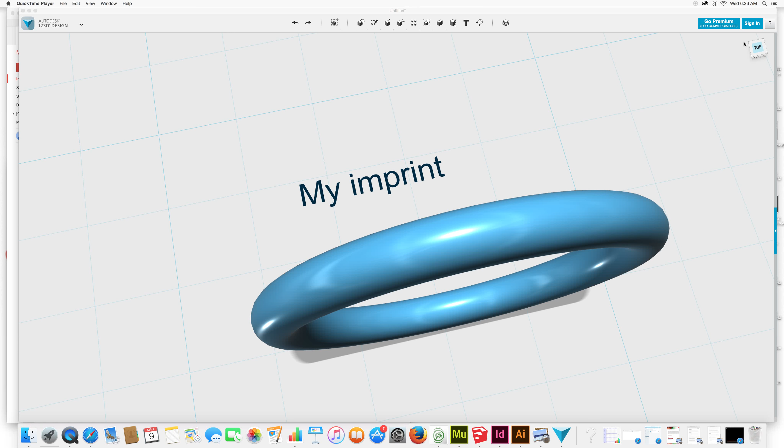All right, so I have my rounded shape, which would be a ring, a bracelet, whatever you may use to create your curved shape, whatever you're designing. And then the question was, how do you imprint into the ring without changing the actual structure of the ring? So I just used text to write my imprint. But whatever 3D solid you're making, that's fine.

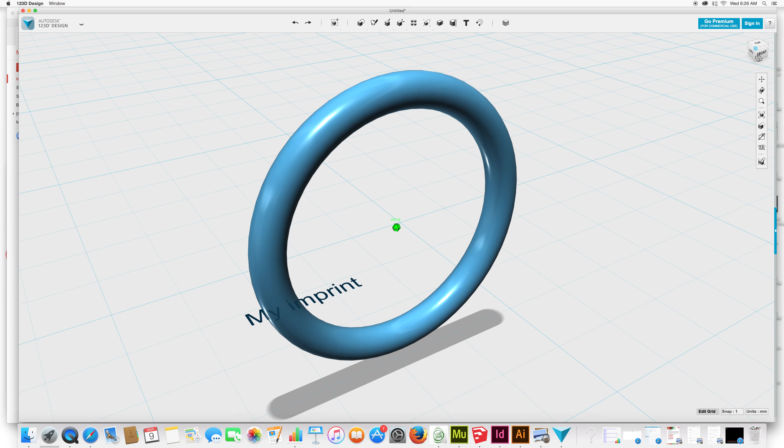Currently, this is not solid yet. So I'm just going to extrude my text so I can have a solid shape. In this case, it will be a solid graphic. And then we'll extrude this actually more than the ring. So you want it to go across. So you need to be actually high enough, your solid shape, whatever it may be, a star and anything, to go all the way through the graphic at varying heights.

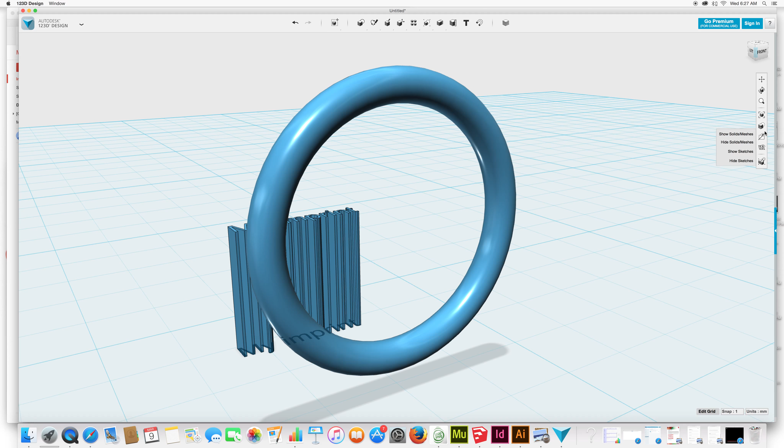So if it's going across the top half of this graphic here, it needs to be long enough to reach through here, but also reach through these parts. So there's my imprint. I always hide my sketches so I don't accidentally select them later. And then I'm going to go over and grab my 3D solid. And now I'm going to start navigating it to actually go into the ring. Move up, and move over.

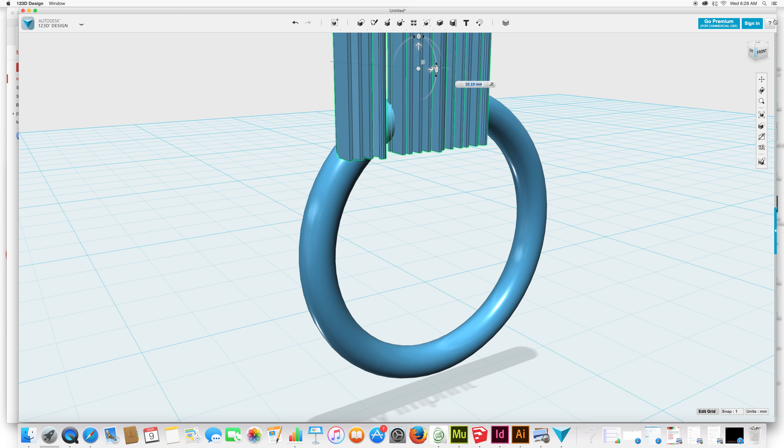Ooh, too far. And I cannot emphasize enough, you have to do this from every view. Don't assume it's okay. You need to turn the ring, try again, turn the ring, try again, until you are happy with the view from all sides. So that to me looks pretty much centered.

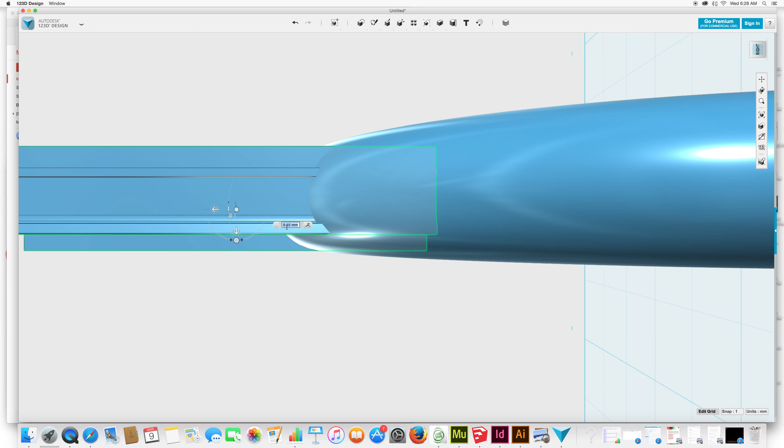To move it in smaller amounts, zoom in, and then you'll be able to move in smaller increments, or you can just type the number right into it. Both options are okay. And then I'll go back to this view. So I'm all the way through. If I don't want it to have a hole through it, then I'm going to bring it up some more. I'm going to change my view over here. So I can just grab the top half like that.

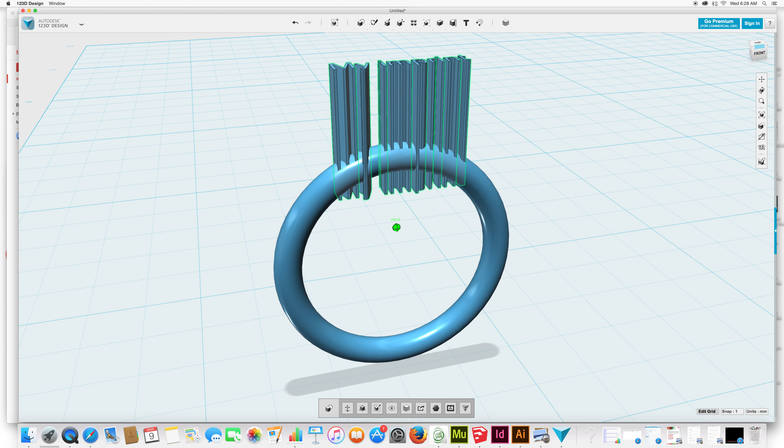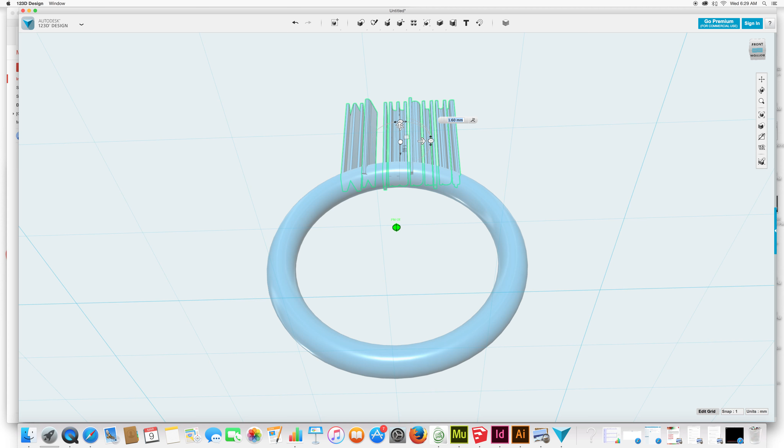If you want to have a hole through it, then obviously it needs to go through everything, which it pretty much does there. But I don't, so I'm just going to move it up a little bit more. So here it's gone through every part of the design. And I don't believe it's extruding. Perfect. So it's not extruding anywhere out. The P obviously is longer, so it goes a little bit down, but that's part of the etching of the font, or the graphic in this case.

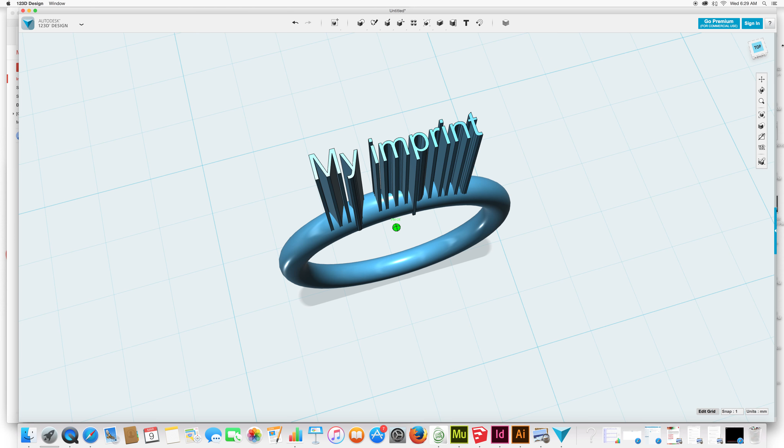To actually create this impression, what you do is you select the combine menu and you subtract. So you select your ring, you select the M, and you hit enter. I'm not sure 100% you can do it all at once. Let's find out. Select the ring. So I can select all of these awesome things.

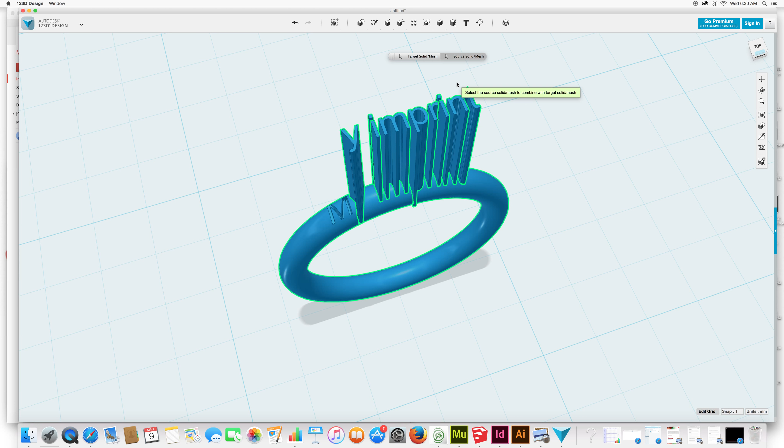Enter. There you go. So you could do it all in one. And that creates the imprint. So it hasn't gone through the ring, as you can see on the interior, but it's created this etching onto the shape. And you can do that with anything, solids, a primitive shape, or you can create a sketch from the ground. In my case, I just used font. Extrude it, find the placement, and then use the combine menu. Hope that helps.